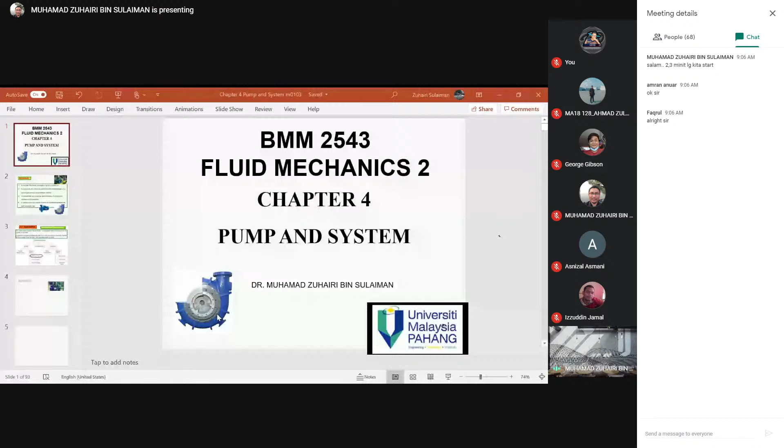Okay. Okay. Okay. By the way,

By the way, I'm Dr. Muhamad Zuhairi Sulaiman, and I'm going to teach you chapter 4 and chapter 5. I guess some of you already know me, but some still don't. My name is Dr. Muhamad Zuhairi, and I've been teaching fluid mechanics in UMP for around 12 to 13 years.

My specialization is thermal fluid, so thermodynamics. Previously I also taught applied thermodynamics and heat transfer.

I think Dr. Ahmed already finished chapter 3, right, before? So for your information, the final consists of 5 questions, and chapter 4 and chapter 5 make up half the marks for the final. So if it's 100 marks, 50 is from chapter 4 and chapter 5. So this is an important chapter for you to score well in the subject.

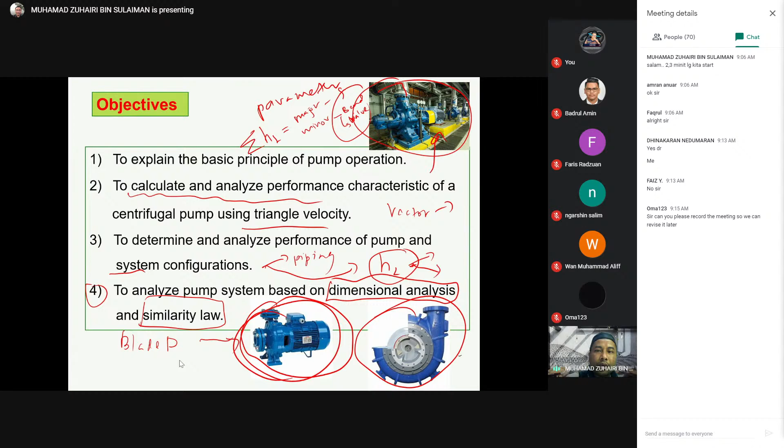We will cover this after this. So for the pump, actually the pump is a subset of a very big category that we call turbo machinery. So when we talk about turbo machinery, people will assume it includes pump, compressor, and turbine. These are devices categorized under turbo machinery.

In our study right now, we are going to learn pump for chapter 4, and after this we are going to learn turbine in chapter 5. As you can see here, the pump is divided into many types.

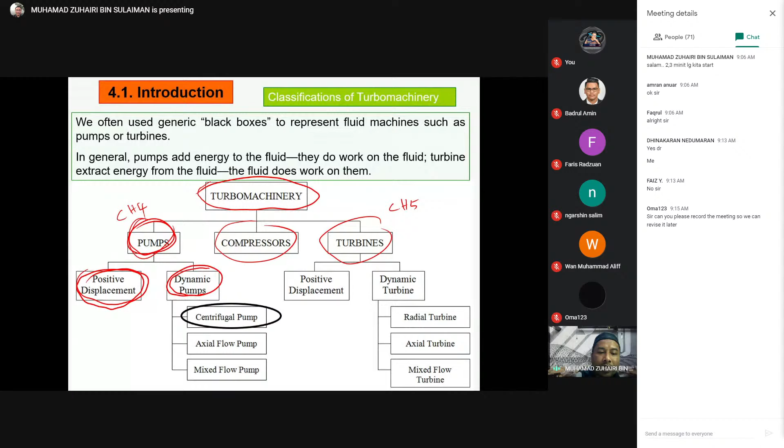So in this case, you are given two types, which is positive displacement and also the dynamics pump. So what is the difference? Positive displacement means you have changes in volume. But for the dynamic pump, you have a control volume, so your volume is fixed.

So in your study, we are going to learn this centrifugal pump. Of course, we have many types, which is axial and also mixed flow, but in your case we are going to focus on the centrifugal pump. Why? Because it is widely used in the industry and also household application.

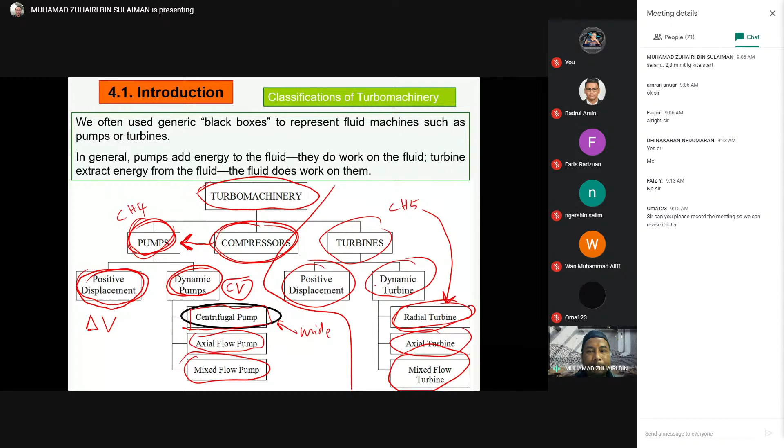Okay, so for the compressor, actually to tell the truth, it is a subsection of pump. But in this chart, it is also a part of turbomachinery. And then the same goes to the turbine, which is positive displacement and also dynamic turbine. So you have a radial turbine, axial turbine, and mixed flow. So for chapter 5, you are going to learn also regarding the radial turbine. Okay, any questions so far?

Okay, before we start, I'm going to give a revision regarding pump, because your friend said just now you need to do some revision. Or do you want to continue straight? Okay, so in this case I'm going to give you a basic explanation regarding the theory.

So let me have some space for the writing. Okay, so actually for the revision, you should know what we call it. Okay, so for the revision, you need to know the first one is the energy equation.

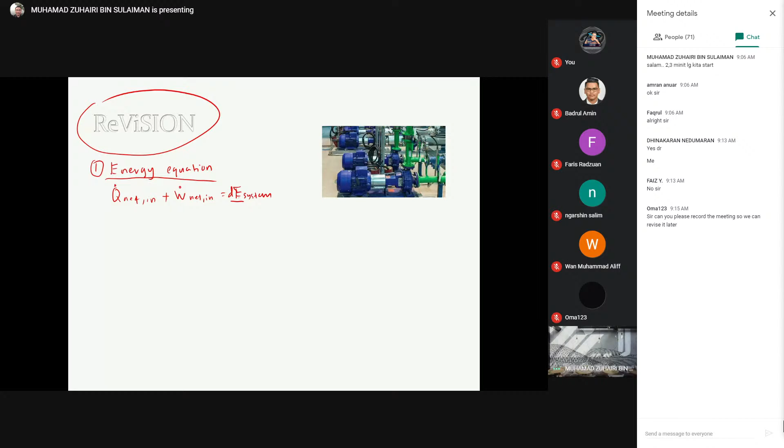So the energy equation is given by Q, heat input, plus work net, equal to the changes of energy in the system over time. This one is heat in, which is the net heat. This is the net work.

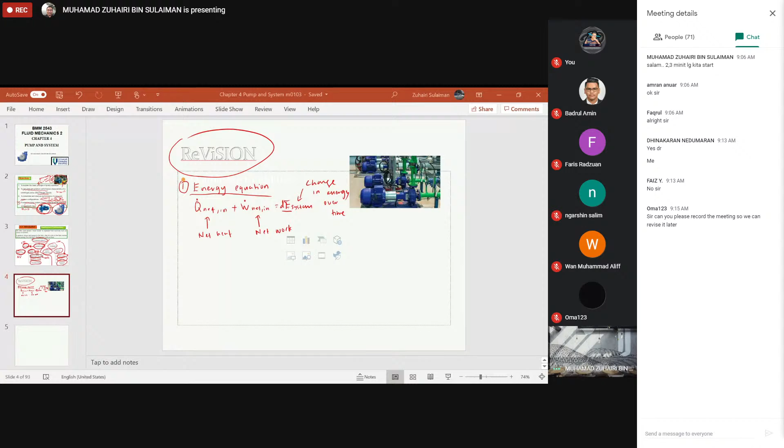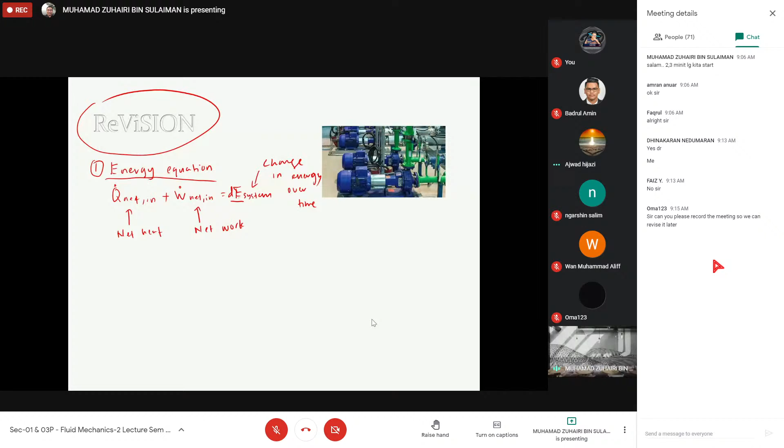Okay, so before you start studying pump, you need to know this one. This is the energy equation.

So from there, you have Q net in plus W net in. So you have two kinds of work: W dot shaft net in plus W dot pressure net in, equal to dE system over dt. So from there, we have this form.

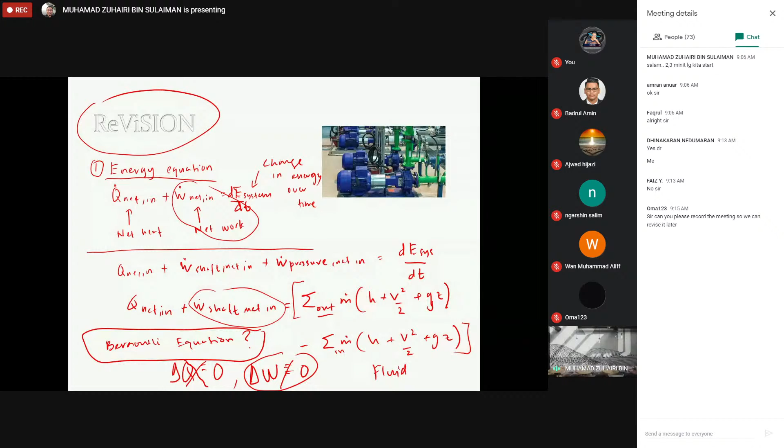So for today, the revision is we are going to use this kind of formula very frequently in this chapter. This is the form, but for fluid mechanics, normally we assume delta Q is equal to 0 because you are not studying heat transfer. But delta W is not equal to 0 because right now you have the work from the shaft. The shaft is related to the pump.

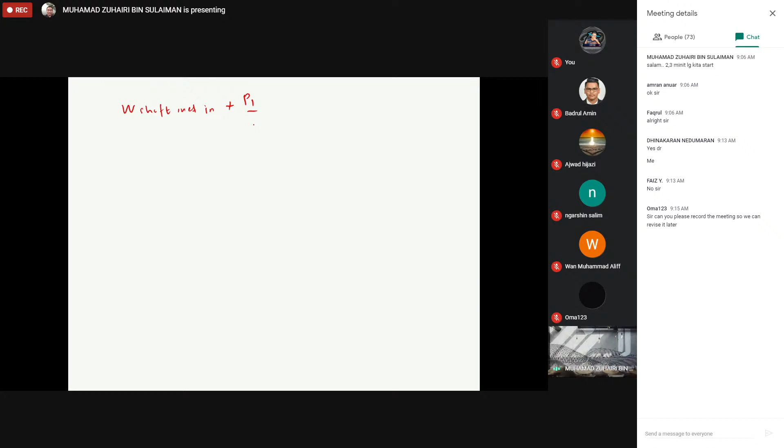So to make it simple, I have a simplified form of the equation, which is P1 divided by rho1 plus V1 square over 2 plus g Z1 equal to P2 over rho2 plus V2 over 2 plus g Z2, and you have E mechanical loss.

So this term is represented by E mechanical loss equal to E dot mechanical loss pump plus loss turbine. So I give you a general equation first, later we eliminate the one that is not included in our analysis. So this term is regarding the mechanical losses. What is the mechanical losses? It is contributed by pump, contributed by turbine, contributed by piping.

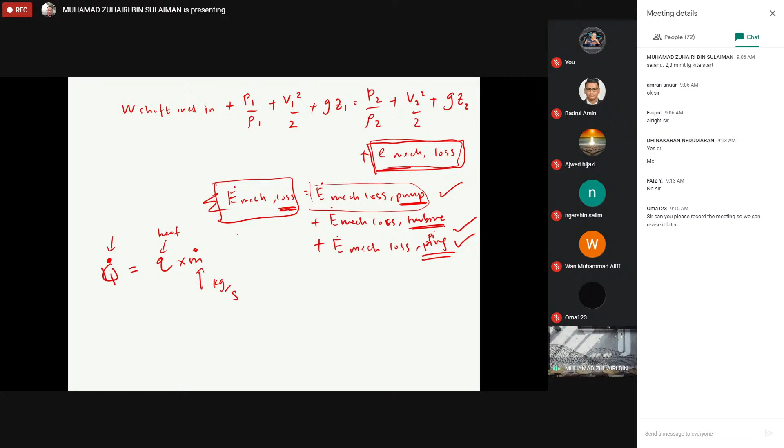In our case, normally you see this symbol Q dot, which is equal to Q multiplied by M dot. So what is this? This is heat. This is kilogram over second, the mass flow rate over 1 second. So this is the unit, this is the heat.

So what is the unit for the heat, Q? It is W. What is W? Watt.

Boleh, sir. Okay, sebenarnya saya banyak sikit ni.

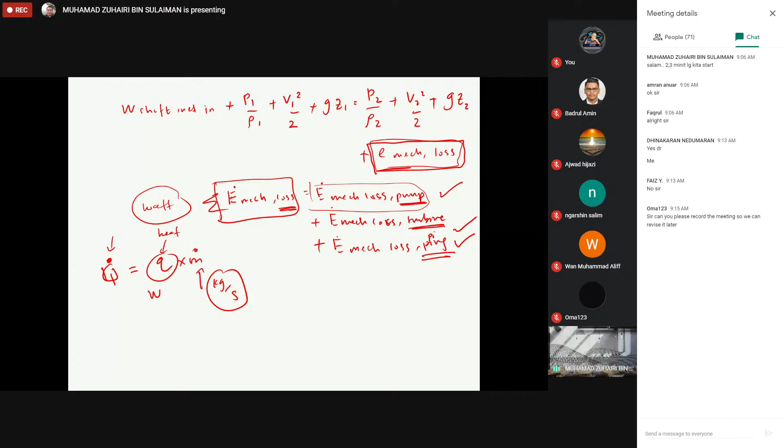So for the Bernoulli theorem, I want to touch a bit about the Bernoulli equation. Okay, you have this equation.

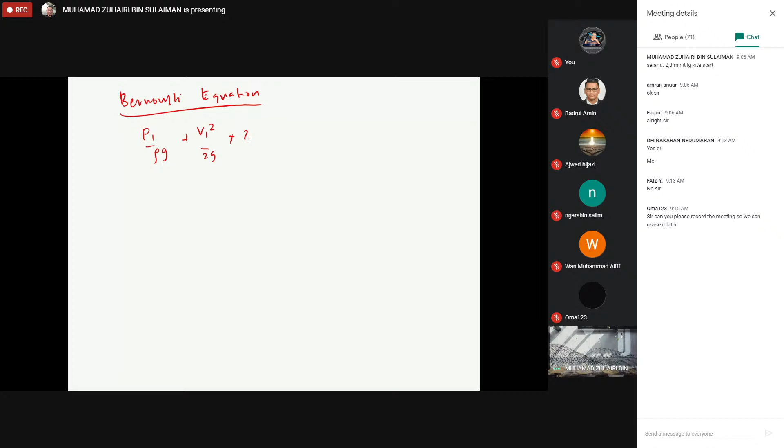So for this Bernoulli theorem, I excluded the pump first, just to make sure you understand this one.

So for example, you have 2 points. This is your pipe. So you have area at point 1, A1, and area at point 2. So this is point 2, this is A2.

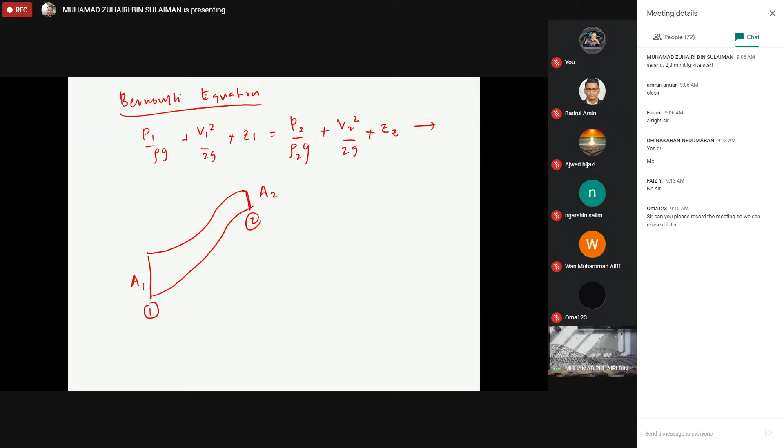Here you have the flow in and here you have flow out. So you have the flow from here to this point. Let's say this is the first level, this is the second level, so this is the height. Height in meter.

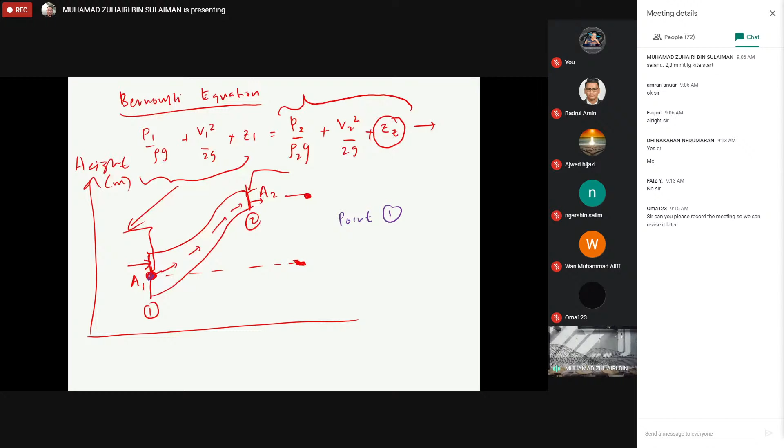So in this case, for example, you have the energy at this point demonstrated by this component. The energy at the first point here is represented by this component. So at point number one, you have this energy, you have this energy, you have this energy.

So this is what we call pressure energy. This is what we call kinetic energy. This is what we call potential energy. Have you ever heard about this before?

Pernah, pernah, but I think the one you learned before is regarding the solid, kan? I mean bola ke, something like solid from a higher object to the lower, the object at the higher level to the lower level, kan? But this time we are dealing with fluid.

Okay, so normally when we deal with fluid, we use density. So before this, did you learn this one? Wait a minute. Kinetic 1/2 mv square plus mgh, correct? This one, dah belajar tak?

So this is the thing you learned before, but right now the same thing, but it is for fluids. When we talk about fluids, normally we use density, density. So for the solid, normally we use kilogram, we use mass. That's the only difference between physics for the solid and also this time for the fluid.

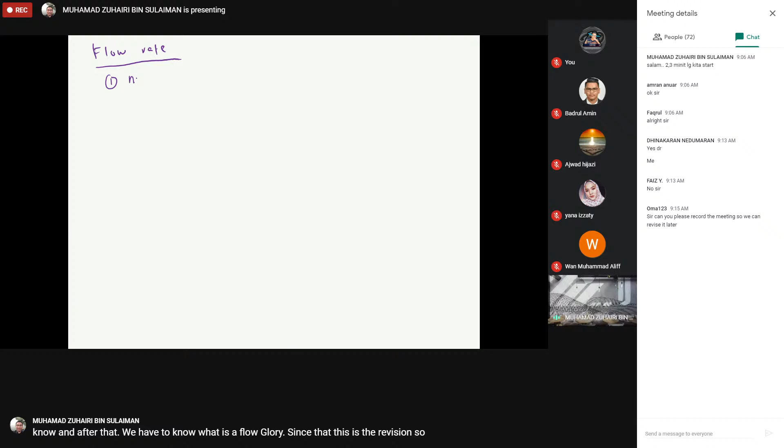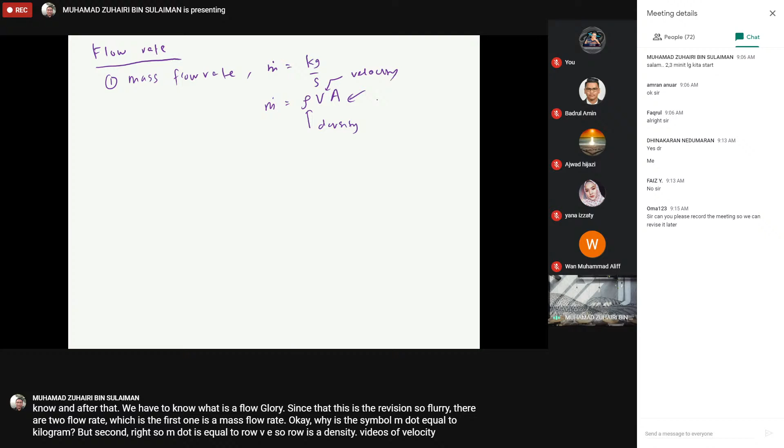Okay, what is the symbol? M dot equals kilogram per second, right? So m dot is equal to rho V A. So rho is density, V is velocity, A is the area.

Okay, I want to recall back. This is point number 1, this is point number 2. So you have here m dot 1, and here is m dot 2, for the fluid.

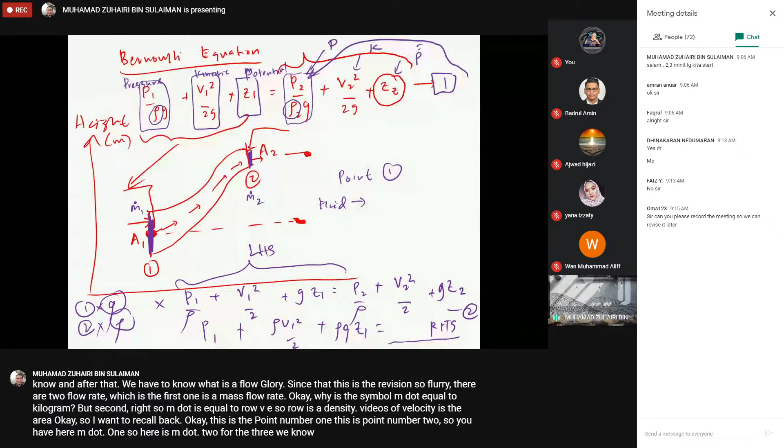We know that fluid has two types, which is the first one is gas, and the second one is liquid. So the gas, in some cases, for example chapter 3, you have incompressible, and then you have also compressible. For incompressible, the change in density is equal to 0, means that rho 2 minus rho 1 is equal to 0, so this one is delta rho equal to 0. But in the case of compressible, the delta rho is not equal to 0, so it means you have a difference.

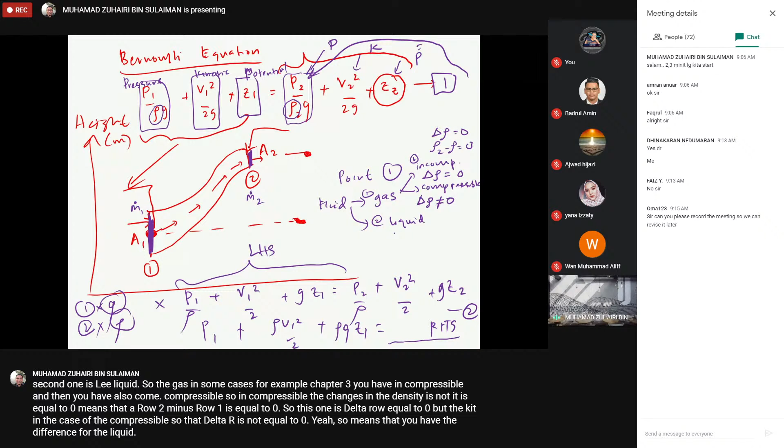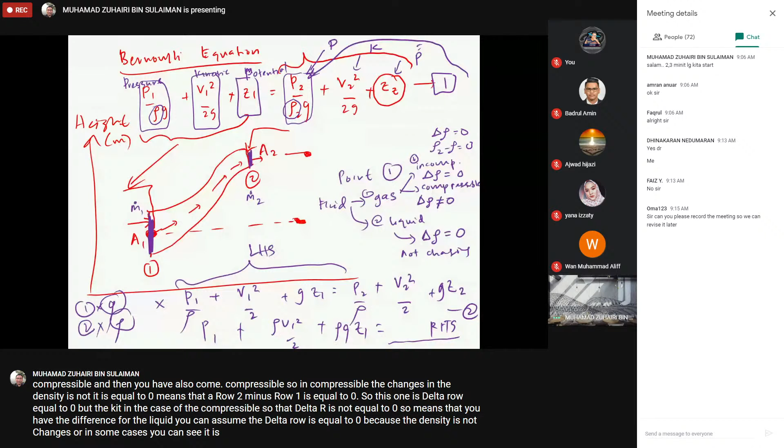For the liquid, you can assume delta rho is equal to 0 because the density does not change, or in some cases you can say it is negligible, very small, negligible. So in our case, we have m1 equal to m2.

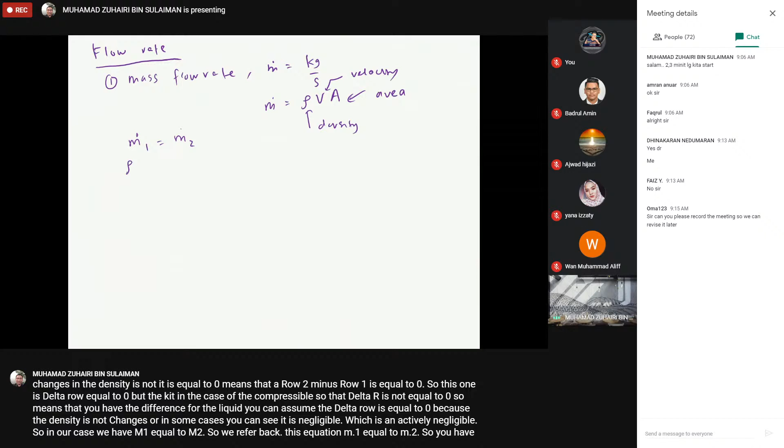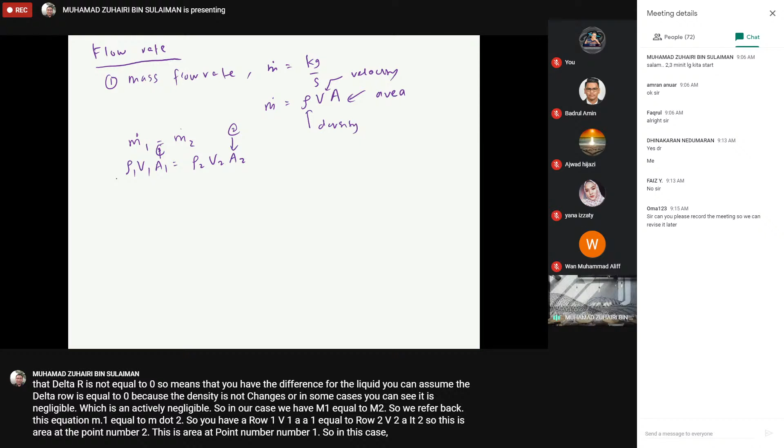So we refer back to this equation, m dot 1 equal to m dot 2. So you have rho 1 V1 A1 equal to rho 2 V2 A2. This is the area at point number 2, this is the area at point number 1. In this case, you know that rho is similar, rho 2 is similar to rho 1. So you get only V1 A1 equal to V2 A2.

So in this case, what is this? This is what we call Q, or V dot. So what is V dot? You have volume flow rate.

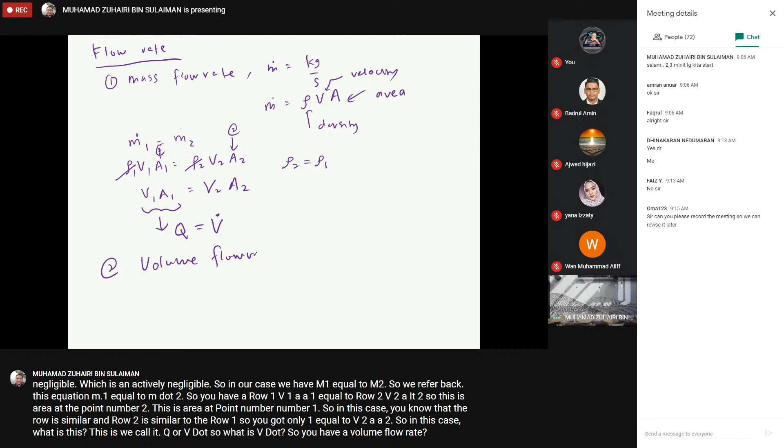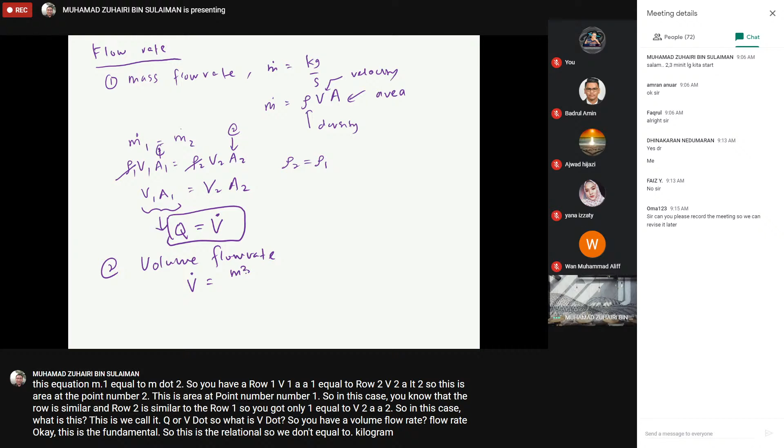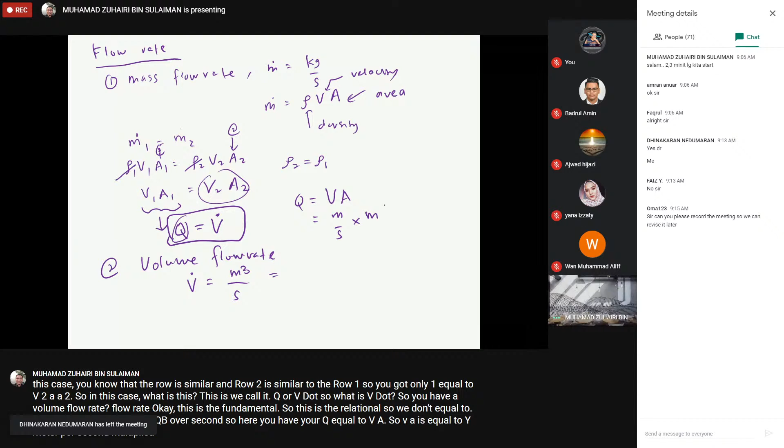Okay, this is the fundamental, this is the revision. So V dot equals kilogram... volume meter cubic over second. So here you have your Q equal to VA. So VA is equal to what? Meter per second multiplied by meter squared.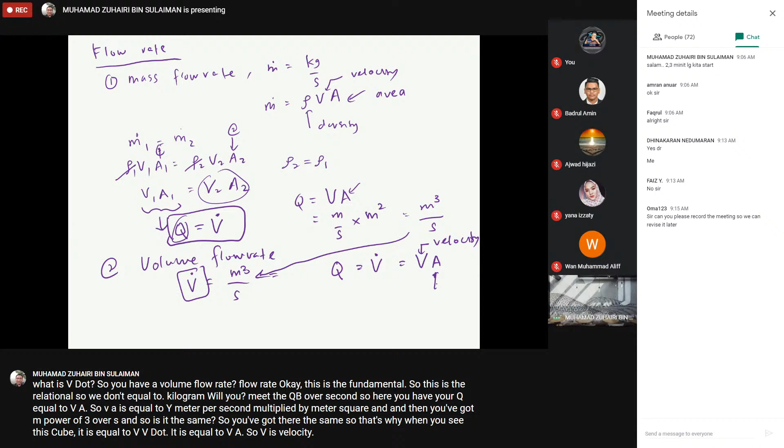And then you get meter cubed over second. So is it the same? So you get the same. That's why when you see this Q, it is equal to V dot, it is equal to VA. So V is velocity, this one is area. Okay, clear, very slow.

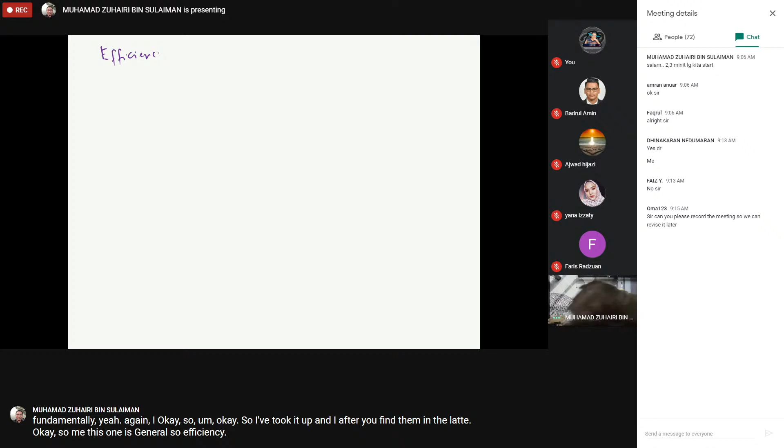So, efficiency. Okay, efficiency. So we have pump, and also we have turbine.

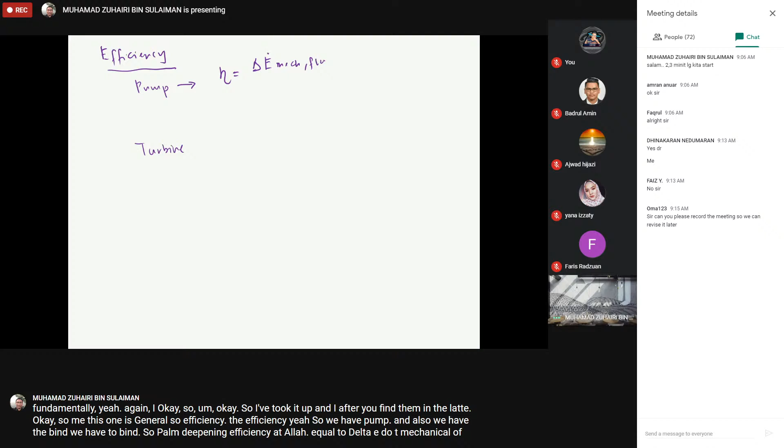We have turbine. So for the pump, its efficiency is equal to delta E dot mechanical of fluid divided by shaft in, equal to W dot pump. Okay, this is tricky, so later I'll explain.

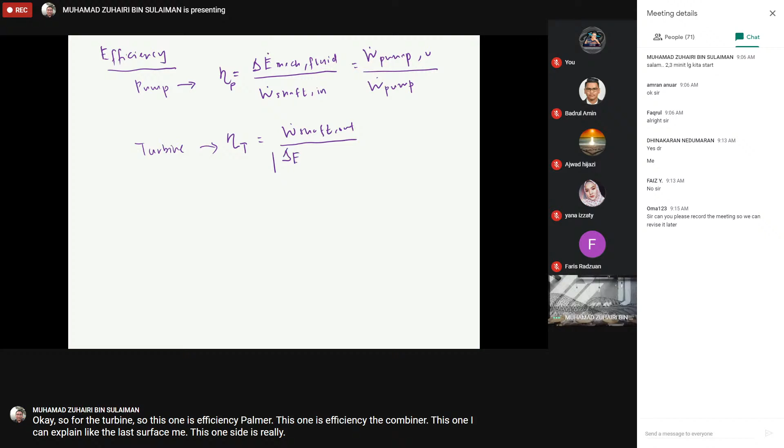Okay, so for the turbine, this one is efficiency pump, this one is efficiency T, turbine. This one I will explain more after this. This one I'll write first. Okay, fluid.

Okay, so what is U? U is useful. This one is extracted. Okay, this one... wait.

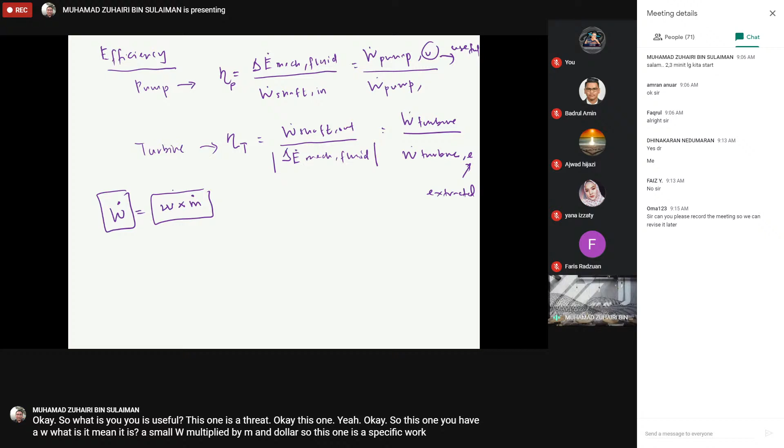Okay, so this one you have W. What does it mean? It is small w multiplied by m dot. So this one is specific work, this one is work, this one is work per unit time. Okay, per unit time, what is the unit time? 1 second per second. Okay, so here later you will go in detail about this.

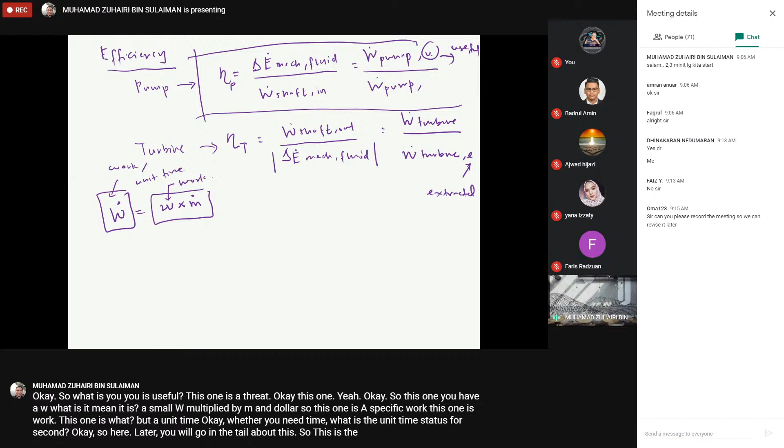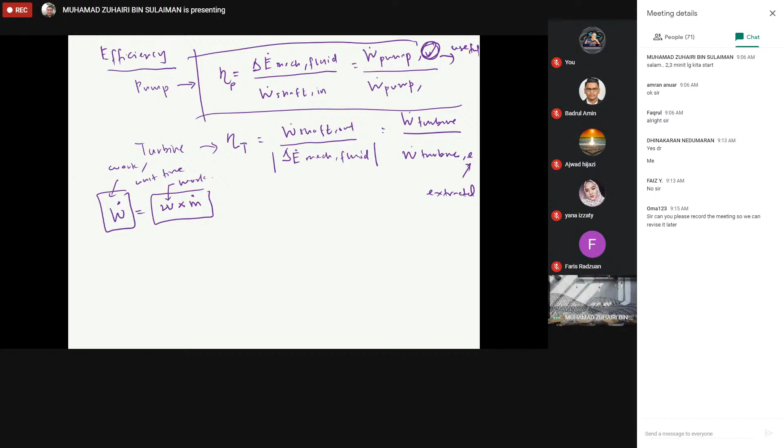So this is the useful, later useful, and this one is theoretical. Yeah, let me check. So this one later I will explain in detail. Today is just revision for this chapter, for what is coming and what has passed.

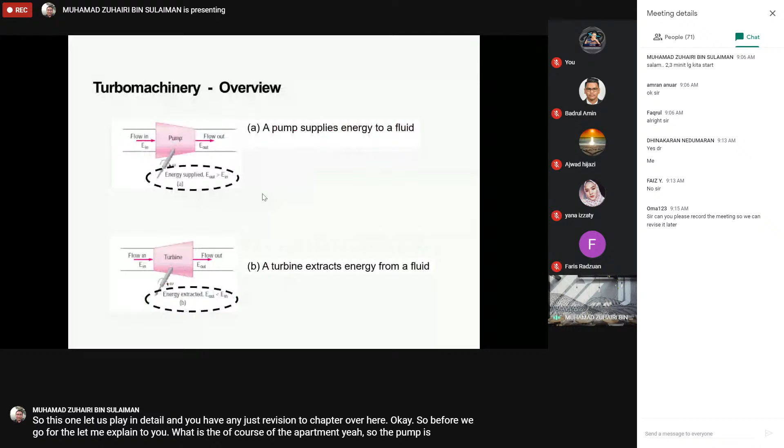Okay, so before we go further, let me explain to you what is the purpose of the pump. Okay, so the pump is... okay, the purpose of the pump is to supply energy to the fluid, to supply the energy to the fluid. So this is a schematic diagram, diagram.

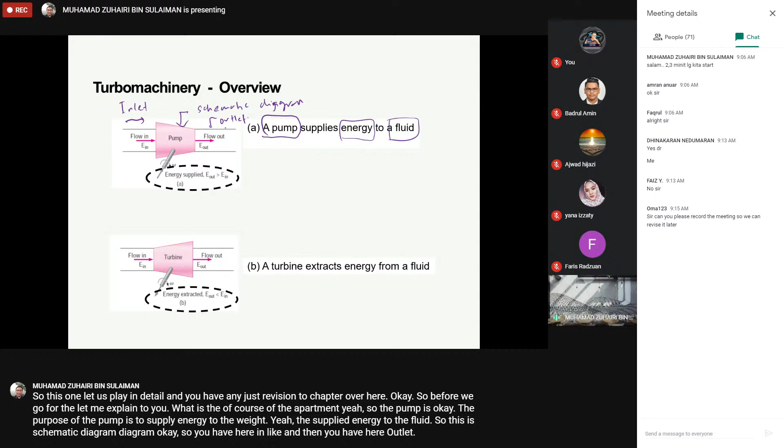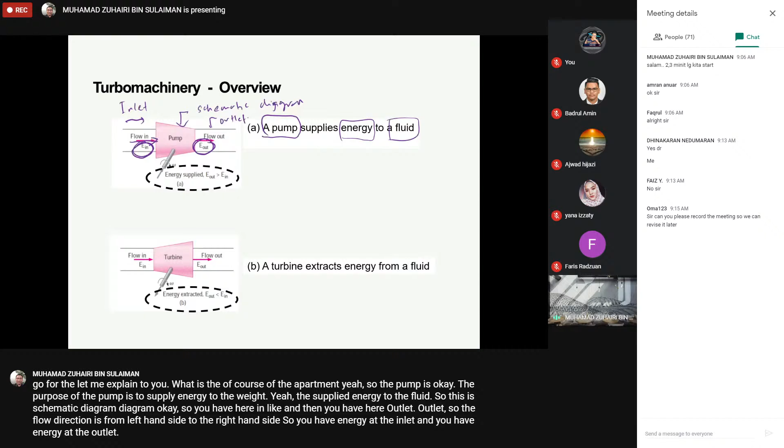So you have here inlet, and then you have here outlet. So the flow direction is from left hand side to the right hand side. So you have energy at the inlet and you have energy at the outlet. So when you supply the energy, which in this case is from the work of shaft, then of course you got higher energy out.

So for the pump, originally the energy is from the electric, and then converted to mechanical energy, and then converted to energy by pressure.

So energy by pressure. What is the energy by pressure? Have you learned about this before? Delta P equal to delta H times rho times G, or rho G delta H. Have you ever seen this formula before? So this is pressure difference.

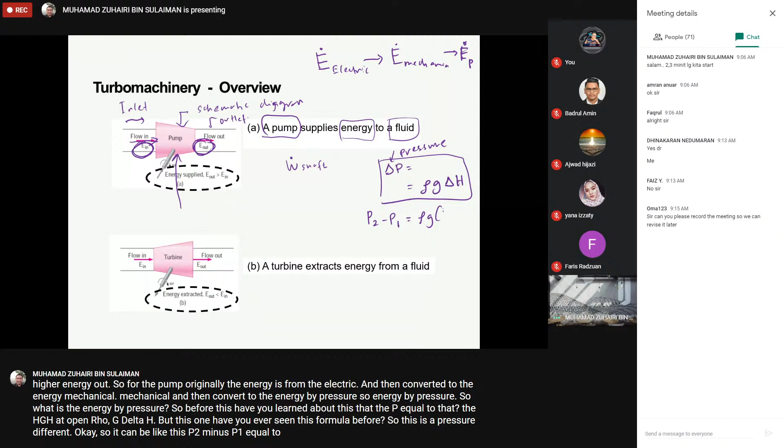So it can be written like this: P2 minus P1 equal to rho G times (H2 minus H1). Before this you learned about height, ketinggian. But this time it's not only regarding the height as you knew it in school.

But now you have to convert this height concept. The unit stays the same - the height is in meters. So in this case, electric energy converts to the rotating impeller, rotating shaft mechanical energy, and then converts to pressure energy.

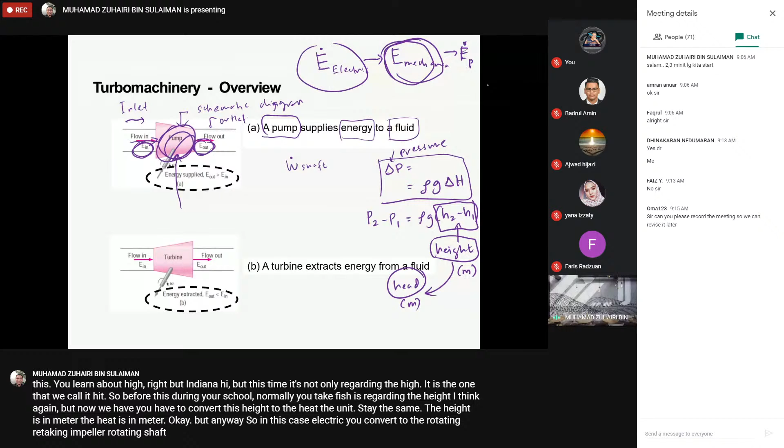For the turbine, you get the energy from the higher reservoir, like a dam (empangan). That kind of pressure energy, or potential energy, goes to the turbine, and then you get electric energy. It is reverse to the first description.

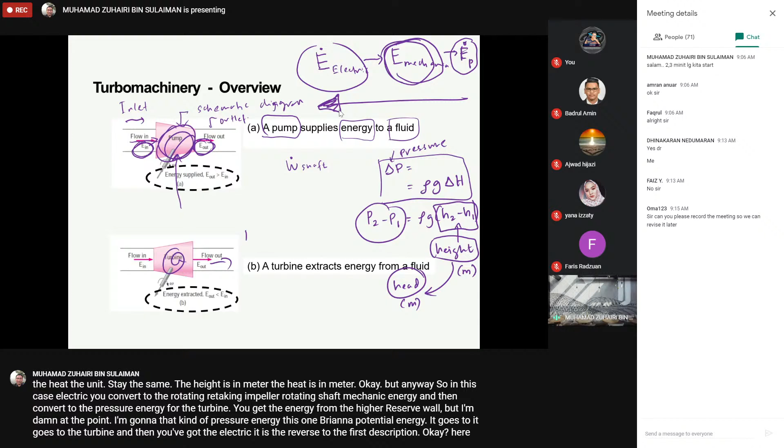Now I'm going to go deeper regarding the pump itself. So you have this kind of setup where you have the diameter of the pipe - the inlet pipe diameter or pump diameter, which is D in. Then the same goes to D out, the outlet pipe diameter.

So now you have two parameters. This one is a fixed parameter, and for V in and P in, in some cases these can be different. So you have pressure in and pressure out, and then V in and V out. In order to understand the flow, you have to apply the fundamental equation I gave you before.

For example, you have the first equation: M in equal to M out. We know that the change in density equals 0. So you have rho1 V1 A1 equal to rho2 V2 A2. So this term is already eliminated.

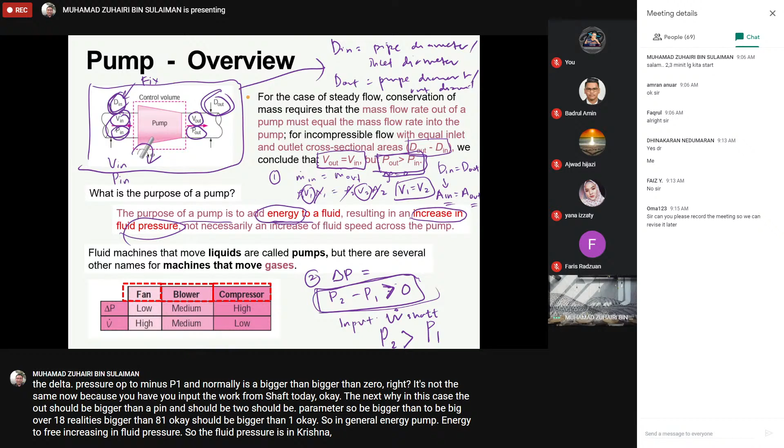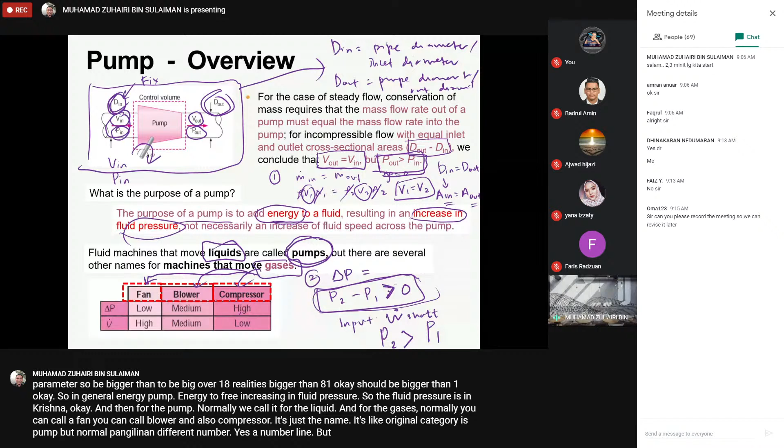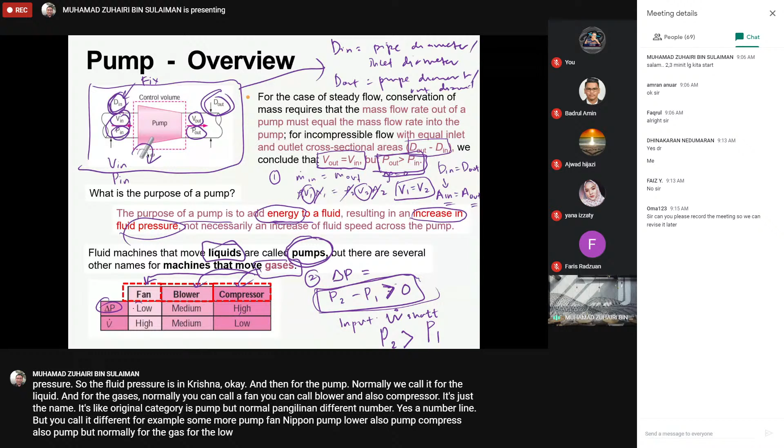For the pump, normally we call it that for liquid, and for gases you can call it fan, blower, or compressor - it's just the name. The original category is pump, but the name you call it is different. For example, everything is pump - fan is pump, blower is also pump, compressor is also pump. But normally for gas, for low pressure difference it is fan, for medium we call it blower, and for high delta P it is compressor.

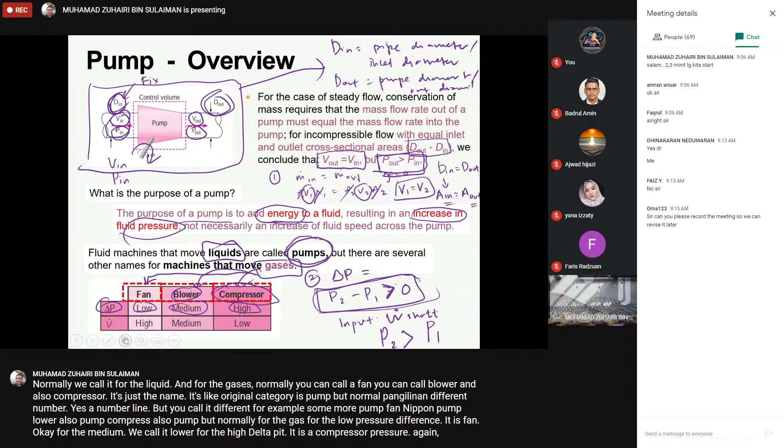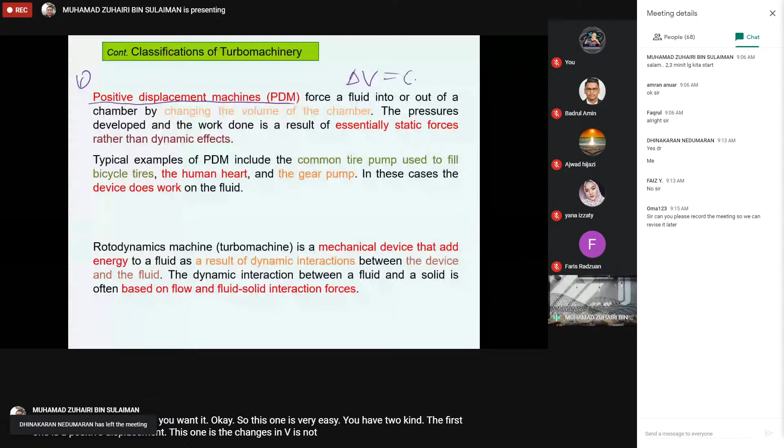Okay, so this one is very easy. You have two kinds. The first one is positive displacement. This one is changes in V not equal to 0, meaning there is change in the volume. So for the rotodynamics, normally we have a control volume. Changes in V normally stay the same in the control volume. That's the difference.

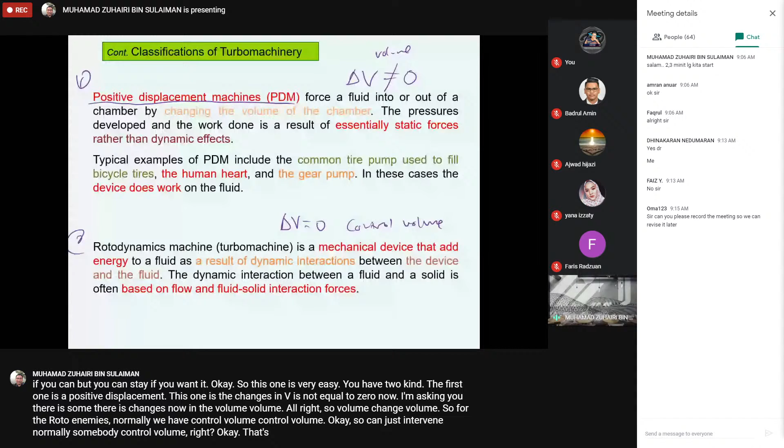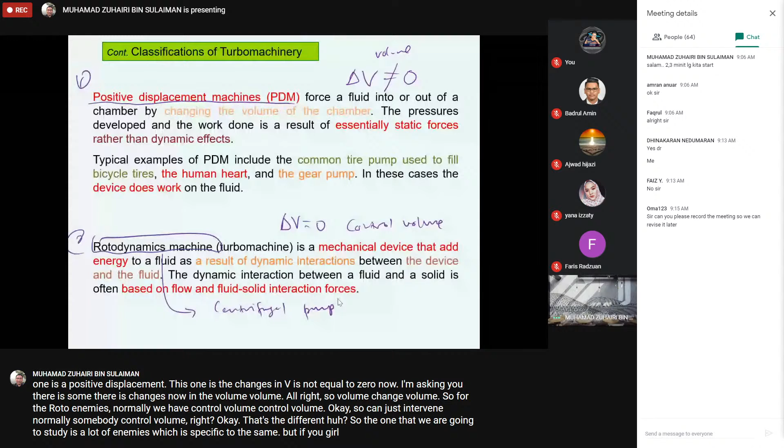So the one that we are going to study is rotodynamics, which is specific to the centrifugal pump. And then this is the example of positive displacement.

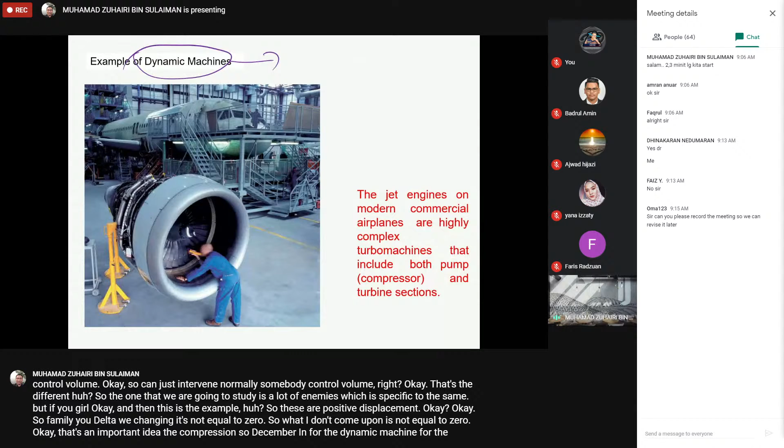Okay, for the dynamic machine, for the rotodynamics - roto means spinning, dynamics means rotational movement, dynamic machine. This is an example: turbo fan.

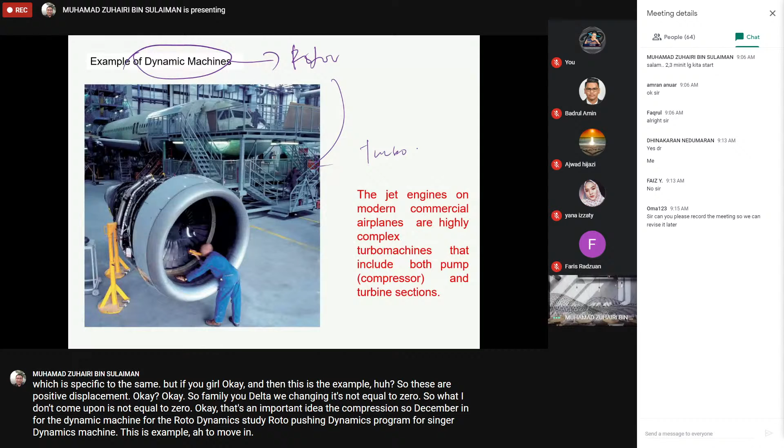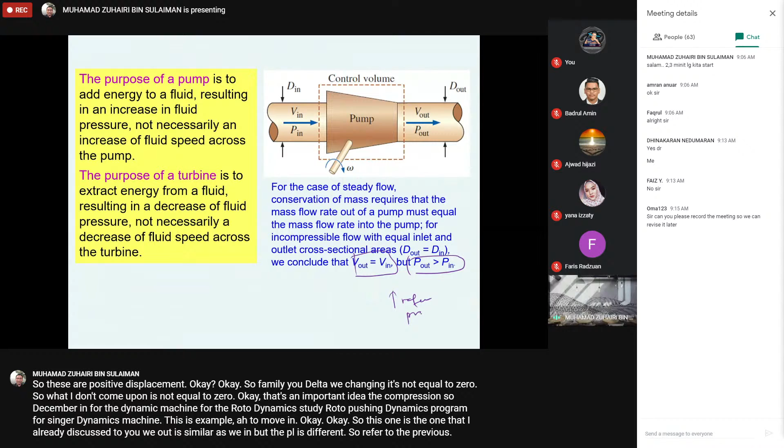Okay, so this one is what I already discussed with you. V out is similar to V in, but the P out is different. So refer to the previous discussion.

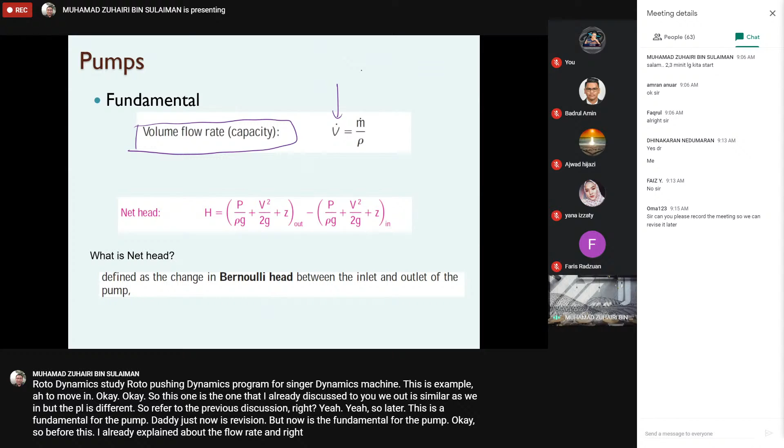Okay, so later this is the fundamental for the pump. Just now was revision, but now is the fundamental for the pump. Before this, I already explained about the flow rate, and right now we are discussing about volume flow rate.

What is the relation between V dot and M dot? It is by this equation. The unit for V dot is meter cube per second, equal to kilogram per second, and you have density in kilogram over meter cubic. After you cancel this, you get meter cubic over second. So in your calculation, please use this kind of method to make sure your conversion is correct, otherwise you will get the wrong answer.

Okay, so right now this is the one that we obtain from the Bernoulli equation. This is energy at the outlet, this is energy at the inlet. So energy out minus energy in gives you the net head.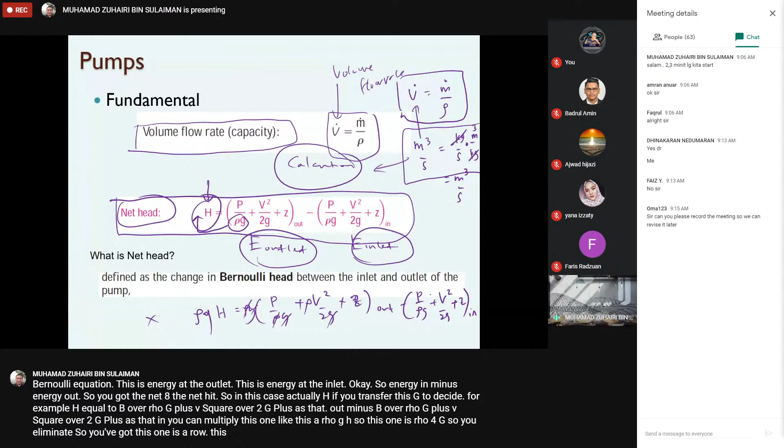The net head - if you transfer this G to this side, for example, H equal to P over rho G plus V square over 2G plus Z out, minus P over rho G plus V square over 2G plus Z in. You can multiply this by rho G, so rho G H. This one is rho G, so you eliminate, and you get rho G Z.

And we know that before this, rho G H is equal to delta P, the pressure difference. That's how you relate them.

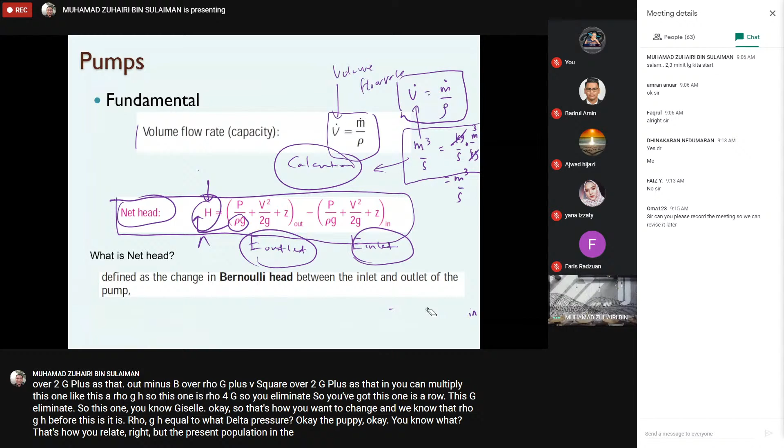But in the present calculation, this one is the net head of the pump. Why? Because we are dealing with this kind of pump. So you have at the inlet - this is the outlet, this is point number 2, this is point number 1. Normally the Z...

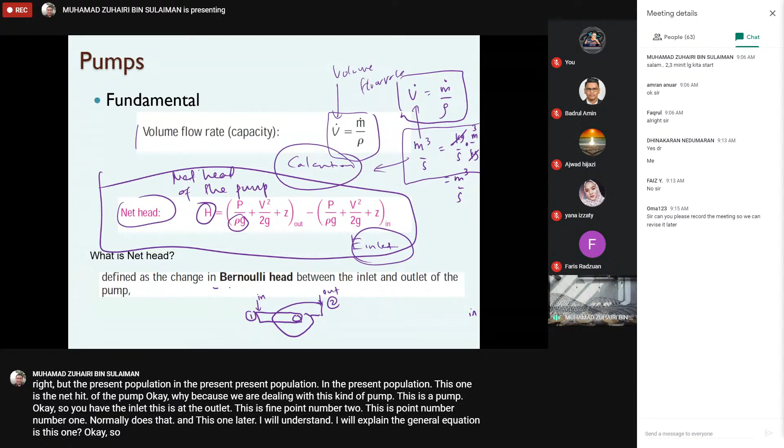This one later I will explain. The general equation is this one. So we use Bernoulli, and what is head? Head is H - as I said before, you learned H as the height, but right now we change H to the head. The unit is still the same.

So in this case, if you see the figure over here for the pump, you have a pump here, and you have a point at the inlet and a point at the outlet. Normally for the pump, you see here Z out and here Z in.

Normally if Z out minus Z in is less than 1 meter, we assume it is equal to 0, meaning there's no difference in the potential energy. That's why you should have V out minus V in over 2G, plus Z out minus Z in. So this is the actual formula from here - this is the net head.

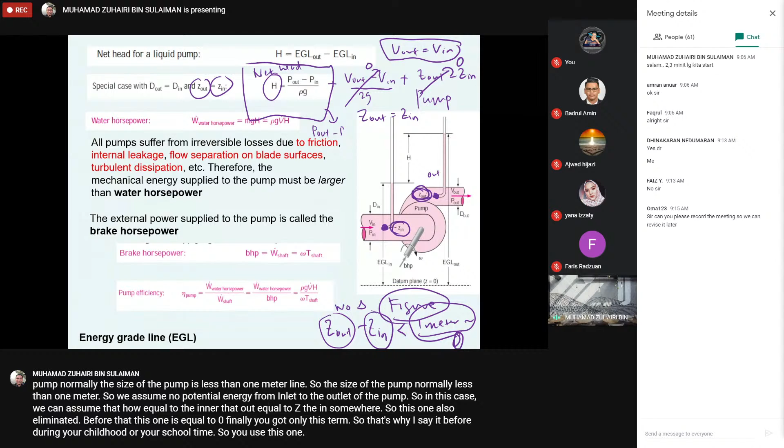That's why I said before, during your school or degree time, you use P out, P in equal to rho G H. So delta P is equal to rho G H, right? This is from your degree or diploma, or during physics class in school. This is the reason why we use it like that.

Okay, we go to the next thing, which is water horsepower. So water horsepower, you have the flow rate.

Inside this you have V dot. So what is V dot? It is Q, normally you say Q flow rate. V dot is also flow rate. In some cases, this V dot can also be written as Q. So you can use rho G Q H. This is what we call water horsepower.

Water horsepower normally already includes friction, internal leakage, flow separation, and blade surface and turbulent dissipation. Inside the pump there is turbulence, you have vortices inside the pump, so there is a loss in energy, and that loss reduces the flow rate.

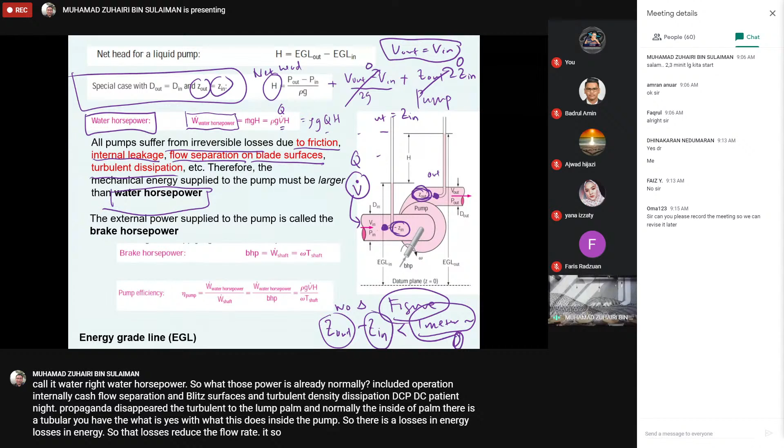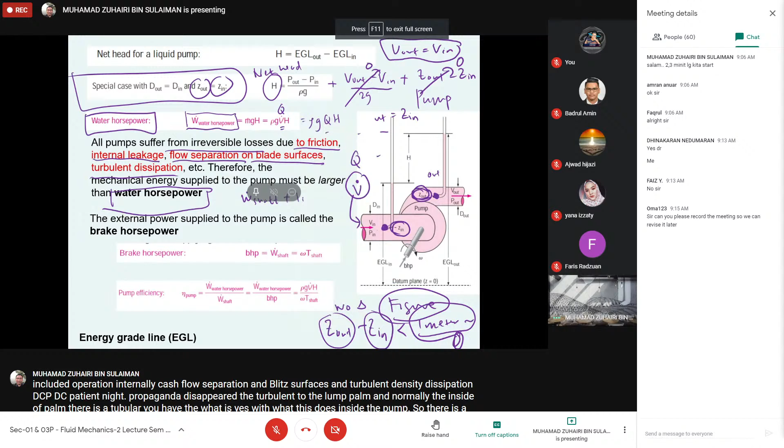So when you consider the losses inside the pump, brake horsepower equals water horsepower plus losses. That one is brake horsepower. So because of the losses, normally when you calculate the work by water horsepower... oh sorry, this is water horsepower.

So the water, when you have the losses, you need to supply more, meaning it should include the losses. So first this is your actual flow rate, and after you obtain the flow rate, there is an extra factor for the power, which is you need to consider the losses. So in order to counter these losses, you have to supply a higher power, we call it brake horsepower.

So this is the power that is supplied by the pump, water horsepower. But for the electric to mechanical conversion, your mechanical HP must be higher in order to counter the losses.

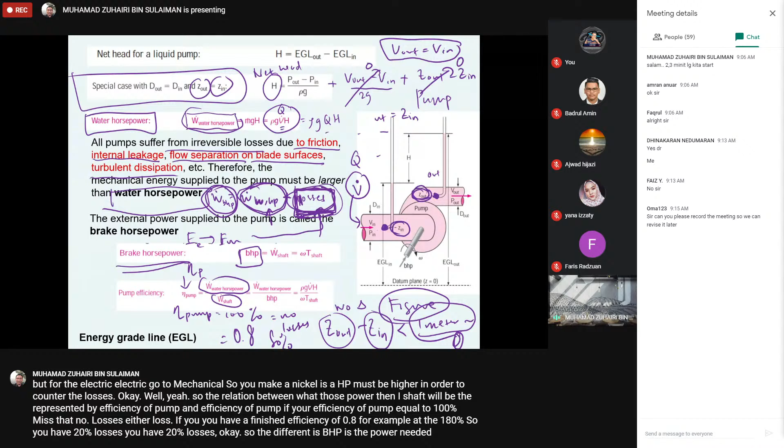So the relation between water horsepower and shaft power is represented by the efficiency of the pump. If your pump efficiency equals 100%, that means no losses. If you have efficiency of 0.8, for example, or 80%, so you have 20% losses. So the difference is BHP is the power needed to supply to the pump in order to deliver this flow rate, plus to counter the losses.

And then another term is EGL, energy grade line. It's the same, only the difference is like a reference point.

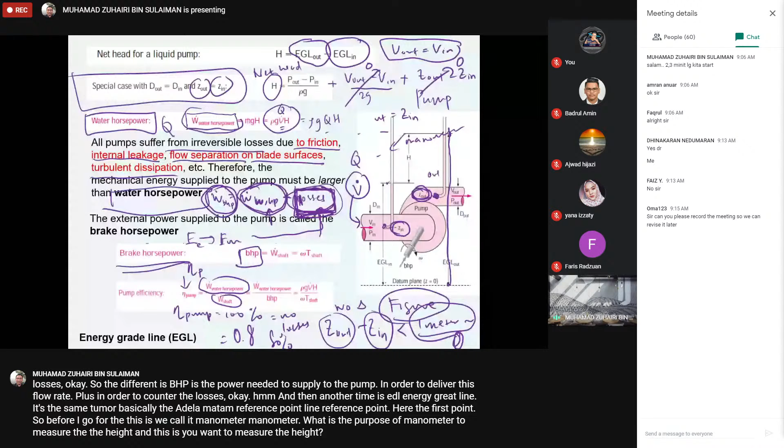Okay, before I go further, this is what we call a manometer. What is the purpose of a manometer? To measure the height. If you see here, this is the difference in height. Like you learned in school, you have P equal to rho G H. This difference in H represents the difference in pressure.

Okay, I guess we need to go later on to the calculation, and then you will understand better.

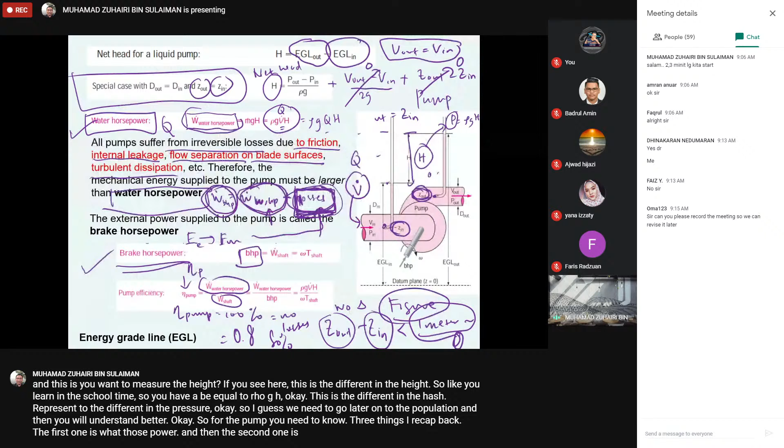So for the pump, you need to know three things. I recap back: the first one is water horsepower, the second one is brake horsepower, and the last one is pump efficiency. And before that, you need to know the fundamental aspects, which is flow rate, mass flow rate, volume flow rate, and also the Bernoulli equation. So right now, what we discuss is regarding the pump only.